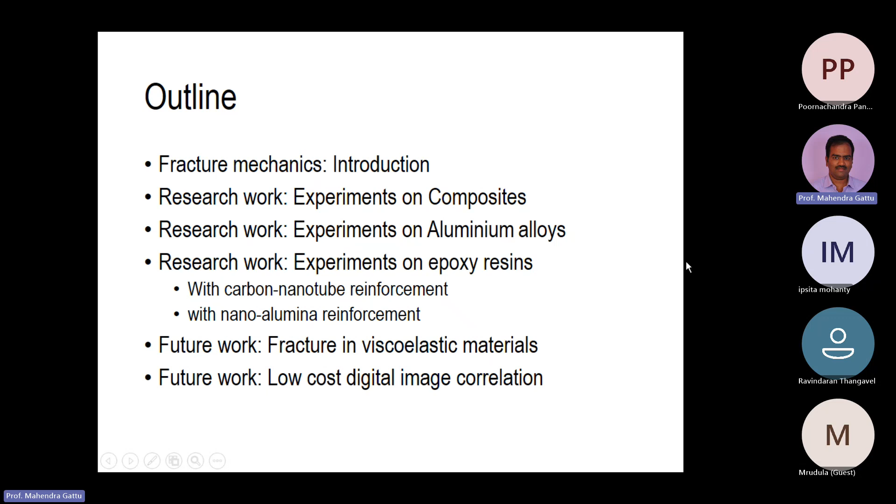I have studied both these reinforcements, the effect of both the carbon nanotube reinforcement and nano alumina reinforcement in epoxy resins. Currently, I'm working in fracture in viscoelastic materials, and I'll go through some of the results in that area. This topic I was supposed to pursue, but due to some reason I couldn't do it.

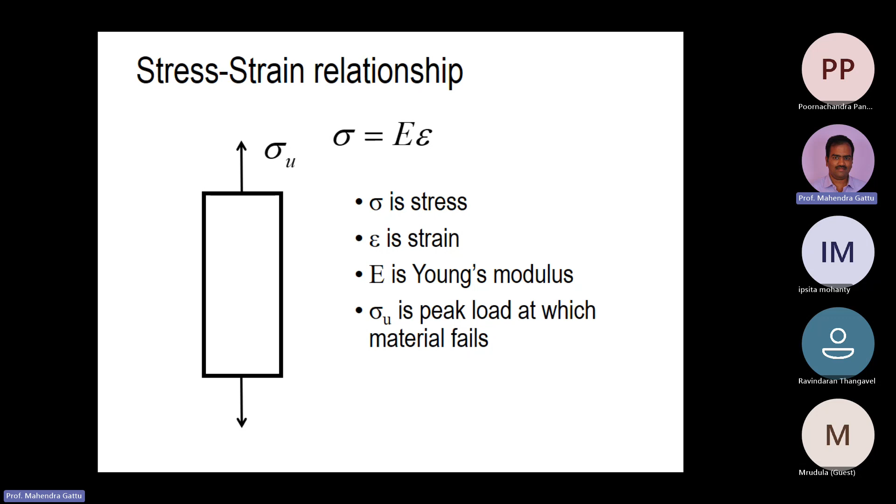This is for a material in which there are no inherent flaws, but most materials have some flaws. Flaws can be holes or cracks which develop during the loading process. So what will happen to the load carrying capacity, the load carrying ability, in presence of cracks? This is the question we answer in fracture mechanics.

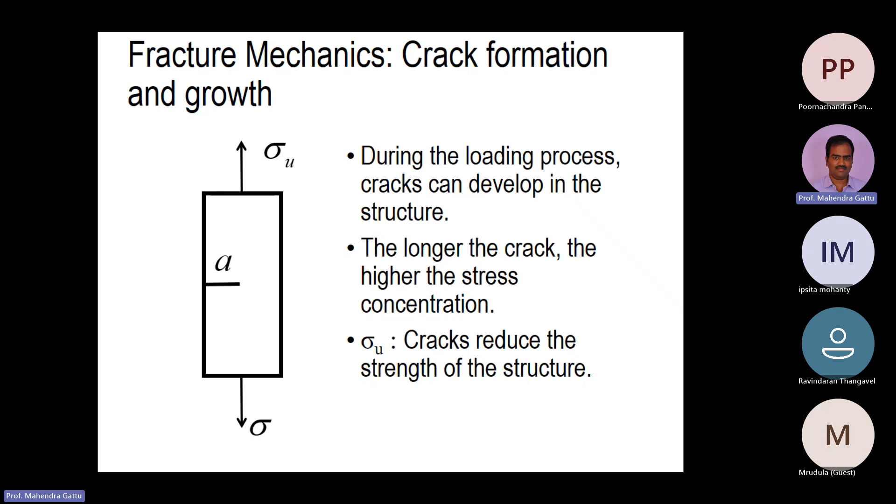As we increase the load, the crack starts to grow, and the material will not be able to take more load, and at one point it will fail, and we can find the peak strength. If you do experiments, what we find is, depending on the crack size, the residual strength reduces. This is the relationship between crack length in the material, the structure, and its peak load.

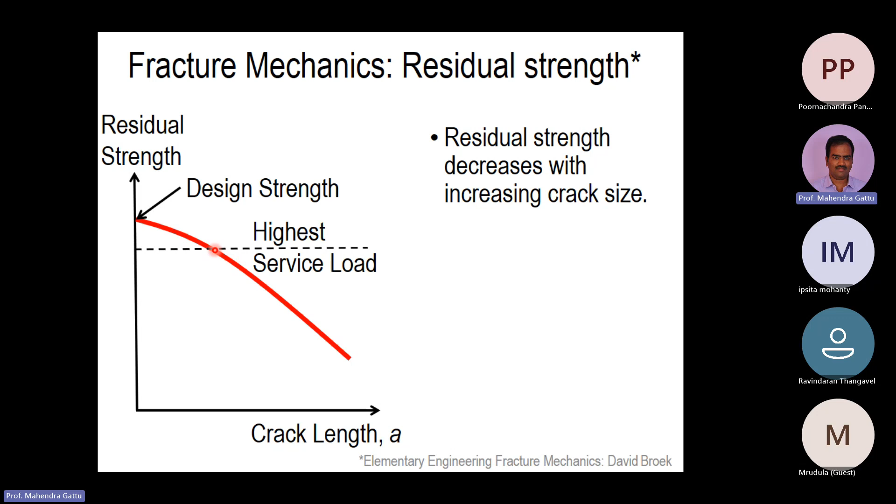As we keep increasing the crack length, the strength of the structure reduces. This has been established experimentally. Without any crack, we have our design strength given by the strength of materials, but in presence of a crack, we have some reduction in strength. Usually, if the crack length is less than a certain value, then for the design service load, the structure is safe. But if the crack length exceeds this value, then for the applied service load, it might fail.

And if the crack length is very large, then the material might fail even for normal service loads, because the residual strength drops with the increase in crack length.

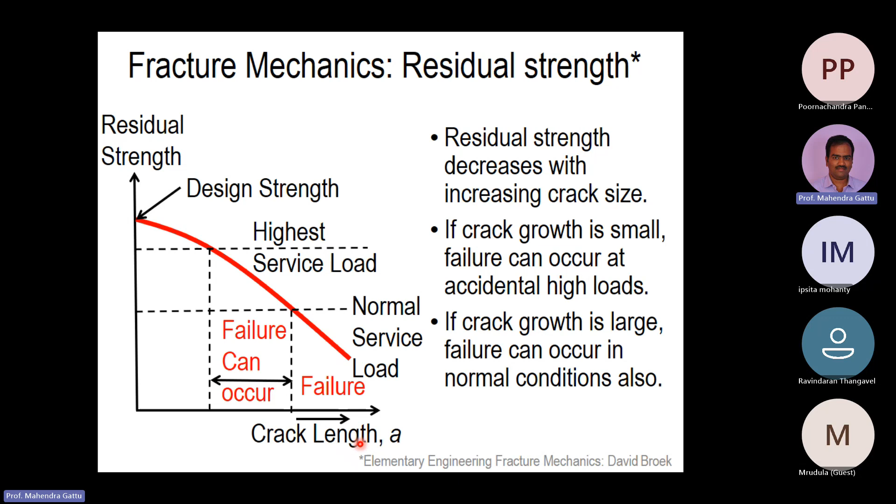In fracture mechanics, we provide a theoretical framework where we look into the strength of a structure in the presence of cracks. That's what I want to convey from this slide. Fracture mechanics, as a subject, is an intersection of a lot of fields.

Depending on the length scale, that is, depending on the size we are focusing on, we can have atomistic fracture mechanics, where we look into the fracture happening between molecules. There is bond energy, interatomic potential, and atomistic modeling of fracture. Going to a slightly higher size, we look into dislocations, material dislocations, and grain boundaries. This part is usually dealt with by material science people.

Going to a little higher size, we have stress-strain quantities and plasticity concepts used to describe metals, and we are in the applied mechanics domain.

At the normal size, like what you see in the real world, we are in the engineering side, where we do testing and such. Whatever tests we do in the laboratories, we transfer that information so that we can actually build bigger applications. Suppose you want to build an aircraft: before actually building it, you do tests in the laboratory and use that information to design the aircraft. Similarly for buildings, if you want to build a column or beam, you do material strength testing at the laboratory level, and then scale it up to find the strength of the structure in real life. Same thing applies for naval structures.

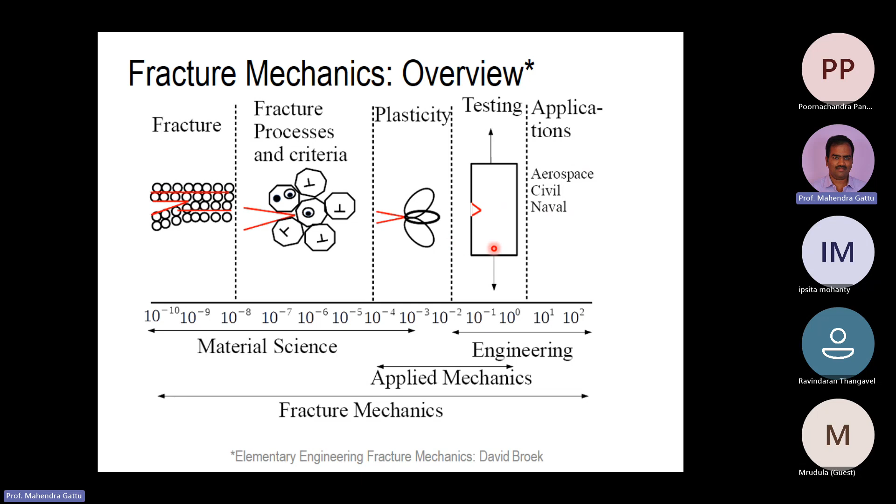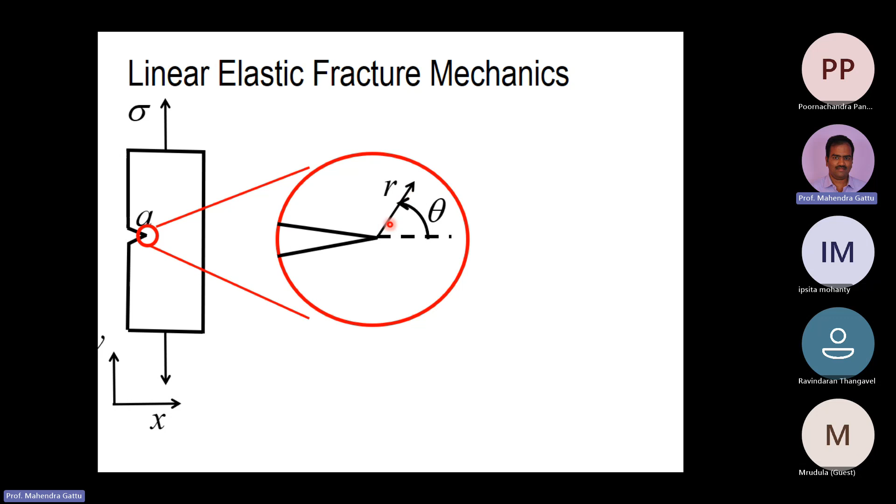We have theta and r as the radial coordinate, and the stress is given by this formula, where K is the stress intensity factor, and stress is inversely proportional to 1 by square root of r. So at the crack tip, we can expect infinite stresses according to linear elastic fracture mechanics theory, and as you move away from the crack tip, the stress will drop down.

We also have the Fij of theta term, which is a geometric factor independent of the applied load. Ki is dependent on the applied load, while Fij is independent of it. So Ki is proportional to the applied load.

What is happening here is when you apply the load, the crack will try to open up. This is called mode 1 fracture, so we have K1, the mode 1 stress intensity factor. Fij is independent of the applied load, and K is proportional to the applied load.

So we can calculate what is the... just one minute. Sorry, yeah.

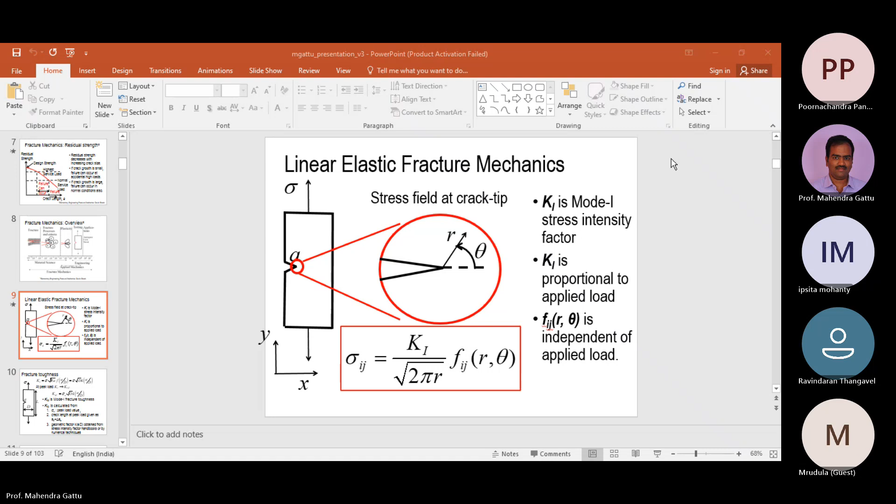In fracture mechanics, there is a term called fracture toughness, which is used, and I will describe it here. We have our stress intensity factor K equal to sigma times square root of pi a, times f of a by d.

So this f of a by d function can be obtained from the stress intensity factor handbooks. Depending on the geometry of the problem, we can look into the stress intensity factor handbook and find out what is f of a by d, and find the KI.

We can rewrite this equation like this also. We multiply and divide by square root d, and then we get square root of pi a by d times f of a by d, which we write as K of a by d. So in my analysis, I will be using this K instead of f. So, sigma square root d K of a by d.

Now, what is fracture toughness? When you keep applying the load, the crack will grow, and at a certain point the peak load will be reached. So we find out what is the K at that peak load. Instead of sigma being the applied load, we put sigma as sigma u. When you put that value and find K, that K is called the fracture toughness, KIC. So KIC is the mode 1 fracture toughness.

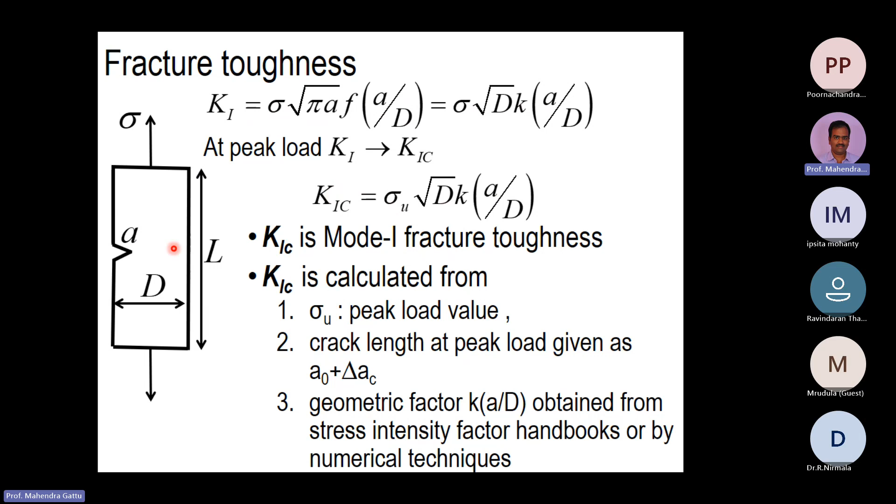But there is a catch here. Actually, in most laboratories, at least in our NIT-RKL, we don't have equipment to measure the crack growth. So what we have to do is we can only get the initial crack length, and we don't know what is the crack length at the peak load. So we use our initial crack length while calculating the fracture toughness. This fracture toughness is called apparent fracture toughness, because we are not actually finding out the crack length at the peak load.

If you have equipment, we can find out the crack length at peak load, and then we get the real fracture toughness. So KIC, with sigma as sigma u and A as A naught plus delta AC, gives the actual fracture toughness. This is one point I want to make, because I will discuss this again later. In our laboratory, without using any equipment, we are able to calculate the crack growth length at the peak load using our testing process. I'll talk about that in the next slide.

So this is about linear elastic fracture mechanics. It was the first starting point where the field began, and then it later progressed to other areas.

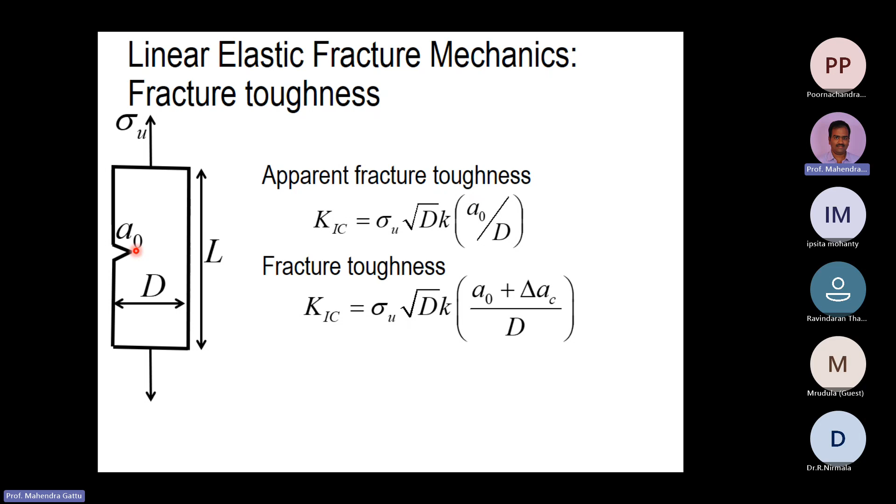In linear elastic fracture mechanics, there are some fracture processes happening at the crack tip, which we can divide into zones. One zone is the nonlinear hardening zone, where the material gives a hardening response - with increase in stress or strain, the stress will increase. The blue color dots represent the softening zone, where voids are created and the material gets damaged. In linear elastic fracture mechanics, these two zones are negligibly small, and we approximate them as taking place at a single point just near the crack tip.

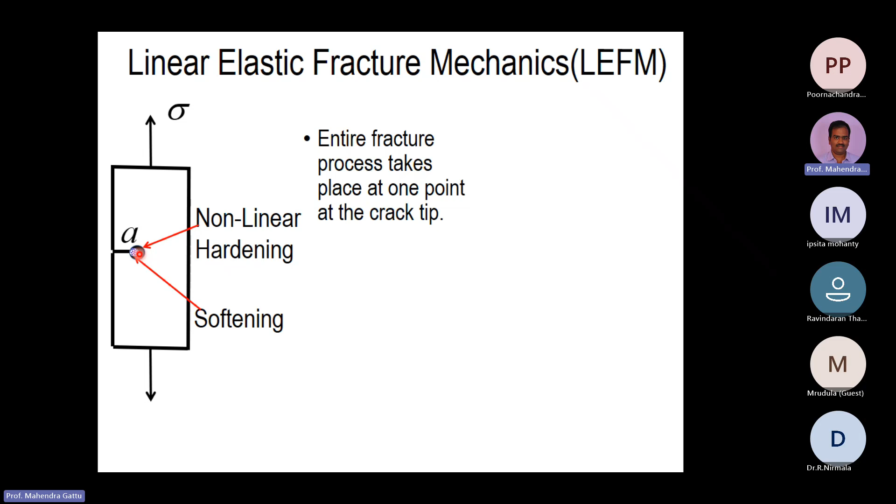This is one main theoretical assumption for linear elastic fracture mechanics - that all the fracture processes taking place happen at a point just at the crack tip. The size of this fracturing zone and nonlinear hardening zone is very small compared to the size of the structure.

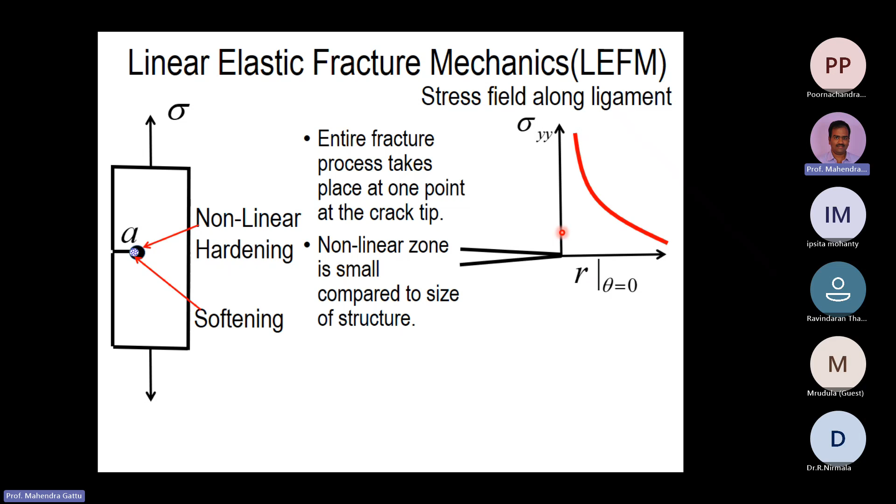If you plot the stress field, KI by square root of 2 pi r, along theta equals 0 degrees, we have the stress field like this. As we approach the crack tip, the stress shoots up to an infinite value according to linear elastic fracture mechanics. But in reality, it is not like that, so we have to modify the theory a little bit to account for that.

So in metals, scientists have developed elastic plastic fracture mechanics. At the crack tip we have a zone of nonlinear hardening and a softening zone. This nonlinear hardening zone is very large and it dictates the crack growth, while the softening zone is negligibly small compared to it.

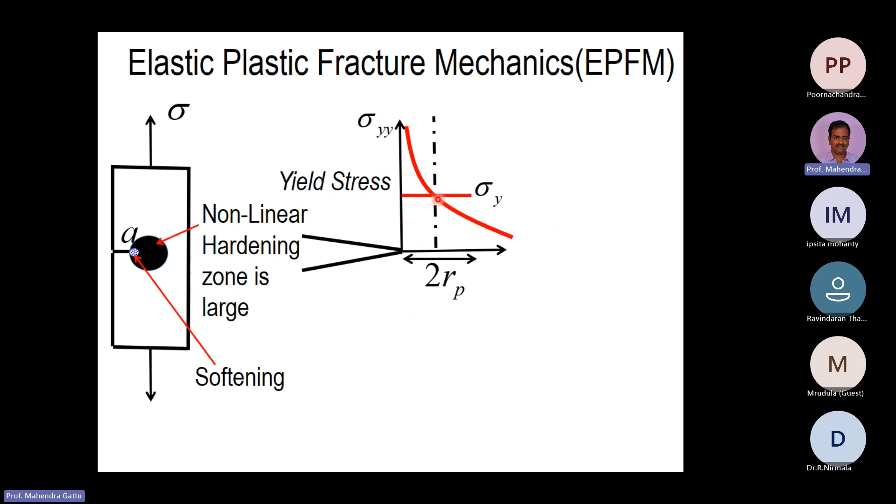As we have seen, the stress at the crack tip shoots to infinity, but actually before it reaches infinity value, it reaches the yield stress, and the material will start to yield in this region. So whenever the yield stress is exceeded, the material will start to yield, and we can find out what is the yielding zone at the crack tip.

If you just apply the formula, sigma y equals KI by square root of 2 pi rp, we get the rp value as 1 by 2 pi times KI by sigma y, whole square.

However, if you go a little deeper and do a force balance of the ligament length—ligament being the uncut portion—we have to adjust this rp value so it is twice the value. This force which is developing will take care of the force equilibrium in the vertical direction. So the actual plastic zone size is 2rp, which equals 1 by pi times KI by sigma y, whole square.

This theory of elastic plastic fracture mechanics is applicable to ductile materials and also tough alloys.

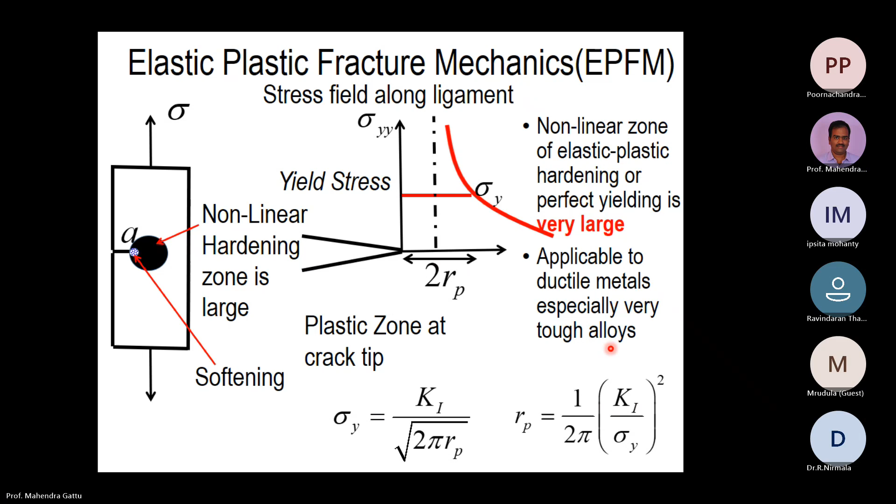Now the field I will describe is quasi-brittle fracture mechanics, for quasi-brittle materials. Most engineering materials are quasi-brittle. For example, concrete, composites, polymers, bones, and many other engineering materials come under this category.

The theory of quasi-brittle fracture mechanics has been accepted by the American Concrete Institute, committee ACI 446. They have recommended quasi-brittle fracture mechanics based design, at least in shear, and included it in the code in 2020. After a lot of research and debate, they have finally accepted this quasi-brittle fracture mechanics. So it is a very important concept for all civil engineers involved in design of concrete structures. So what exactly is quasi-brittle fracture mechanics?

At the crack tip, as I said for metals, we have a nonlinear hardening zone and a softening zone. For concrete, this nonlinear hardening zone is very small compared to the softening zone. The softening zone is very large.

The softening zone consists of micro cracking, void formation, interface breakage, and frictional slip. Frictional slip means aggregate frictional slip can happen. Void formation means creation of voids, and micro cracking means small micro cracks which will coalesce and become a larger crack. Interface breakage means breakage between the matrix and the aggregate. All this comes under softening.

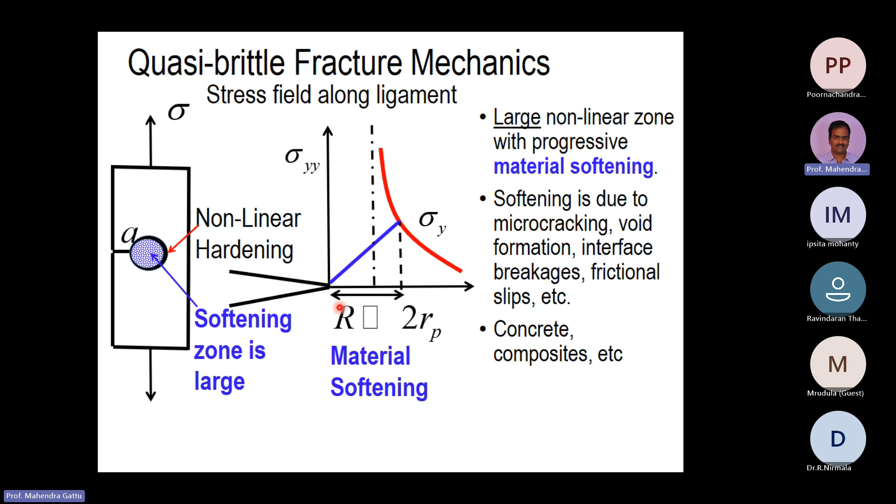For quasi-brittle fracture mechanics, we have developed one model called the equivalent elastic crack model. I will describe a little bit of mathematics, and hopefully you will be able to appreciate it when I present the analysis of the experiments.

In this equivalent elastic crack model, we have A naught, which is the initial crack length before a load was applied. As you keep applying the load, the crack length will increase. Initially, fracture will start to happen at the crack tip with small micro cracks, and those micro cracks will become larger cracks, and finally we can see a physical crack that is materially separated.

At the peak load, we can see some physical crack here, and the crack tip has moved from this point to this point. We are now seeing a fracture process zone size, which is shaded, shown as a shaded region.

So this is what is happening in reality. There is this initial crack length, this physical crack, and at the new crack tip there is this fracture process zone.

Let's say the tip of the fracture process zone is S, and the tip of the physical crack is T. For analysis purposes, at the peak load, we approximate this fracture process zone and the physical crack by this stress distribution.

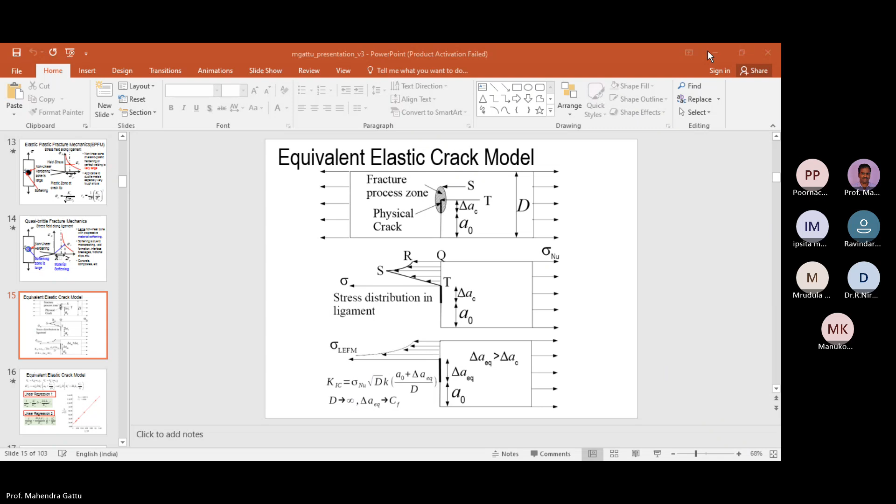So we have the structure size D here. As the structure size increases, becoming large, this delta A equivalent will approach one value called CF, the material characteristic length. For very large structure, meaning infinite size structure, this delta A equivalent will stabilize and reach one critical value called CF, a material property. So for a very large size, whatever fracture, the maximum possible fracture process zone which you can develop is CF, called the material characteristic length.

We can simplify the equations of this equivalent elastic crack model. We have KIC, squaring the term, and K naught square is a function of alpha naught plus CF by D. For large size, we are just putting delta A equivalent as CF.

And here we do a Taylor series expansion. If f of x plus delta x equals f of x plus f derivative times delta x. So here K naught square, K naught of alpha whole square, denoted as K naught square of alpha naught, and the derivative of K naught of alpha square is 2 K naught K prime. The delta x value is CF by D. This is a simple Taylor series expansion we are doing for the KIC square.

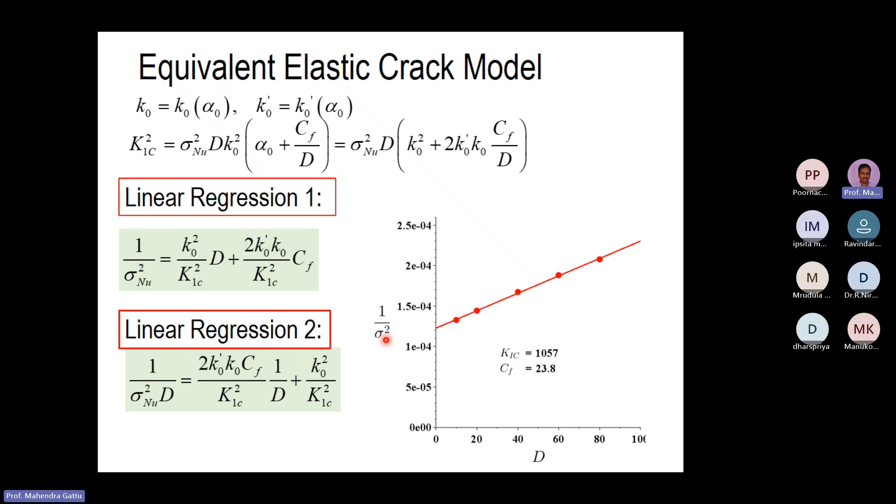Hey, hi Mahendra. I was busy in a meeting, I joined just now, sorry for that. Who was speaking, sir? Sai speaking here. Oh okay, Sai Krishna, nice meeting you. I was busy in other stuff, I just joined, I just got a guest. I forgot your previous data. Okay, thank you for joining. It was Sunday time. I'm actually recording this video so that in case I can send it to the participants. And point taken, thanks, I'll continue. Yeah, you can continue.

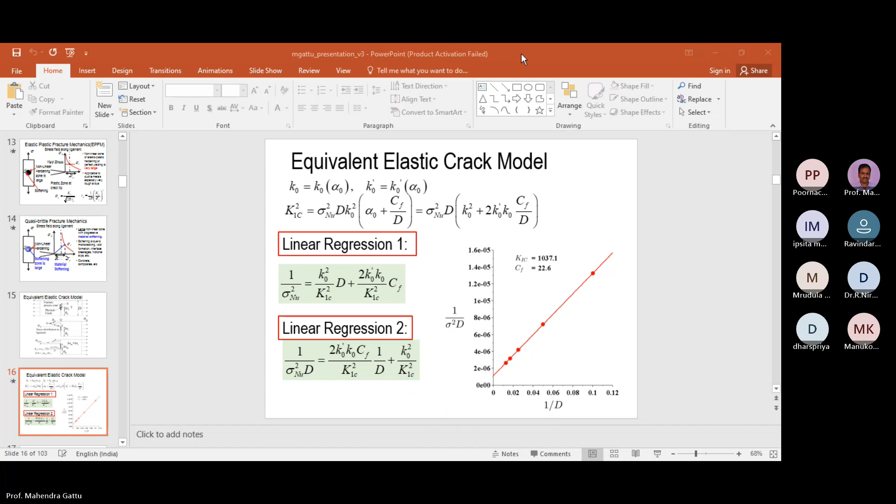So basically, I have written some FEM code where I have calculated the peak load values for different sizes, and I plot 1 by sigma square on the y-axis and d on the x-axis. D is the size of the structure, and I can see that the quasi-brittle simulation curve is coming.

This 1 by sigma square term is on the y-axis, and D is on the x-axis. So if we find the slope of this... What simulation have you used for calculating this?

I have used a cohesive crack model. In a cohesive crack model, we model the material by using a traction separation law. I think you have missed the previous part, so I'll just go through that.

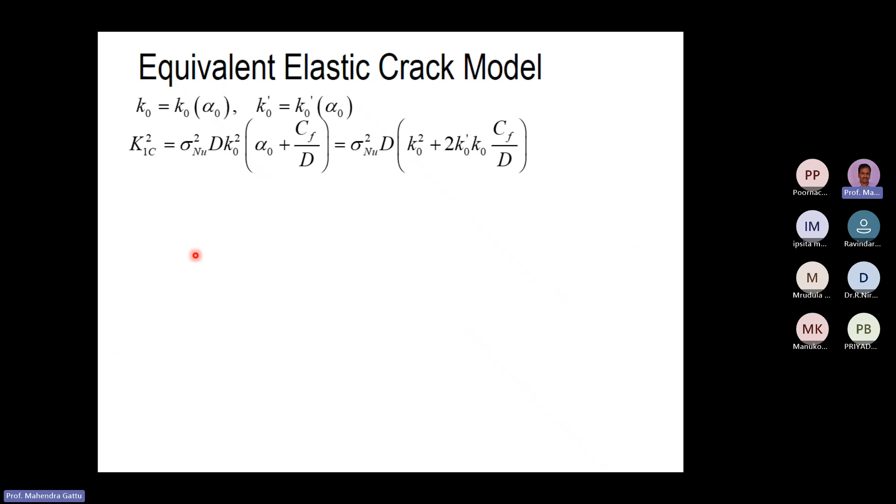So what is happening here is at the crack tip, there is a fracture process happening. Fracture process means material is breaking up, and that means the material's load carrying capacity is getting reduced. So this ligament, this region, we can model using a cohesive crack model. That means the peak stress has reached in this region and the material has started failing, so the load will drop down - that load dropping down is shown here.

So the maximum stress which the material can take is here, and beyond that, when you keep loading it, the material is softening - this is the softening part. So at this point, does the load fluctuate?

No. At the crack tip, fracture is happening, meaning the material is breaking up. But that fracture is not at a point - it might even elongate or something like that. Yeah, that is what I'm saying, this is the fracture process. That means in this region, fracture is occurring everywhere.

But within this region, certain part of the region has more fracture, so its load carrying capacity is very less. You are talking within the boundary of a crack, certain part might be... that is what you are calculating, right?

Yeah, so if you see here, this region is uncracked, nothing has happened here, so the peak load has not yet been reached. But at the crack tip, the peak load has been reached, the material has broken down, and the load carrying capacity has reduced. So the actual load carrying capacity is this much only in this region, and if you just go near the crack, it is very less.

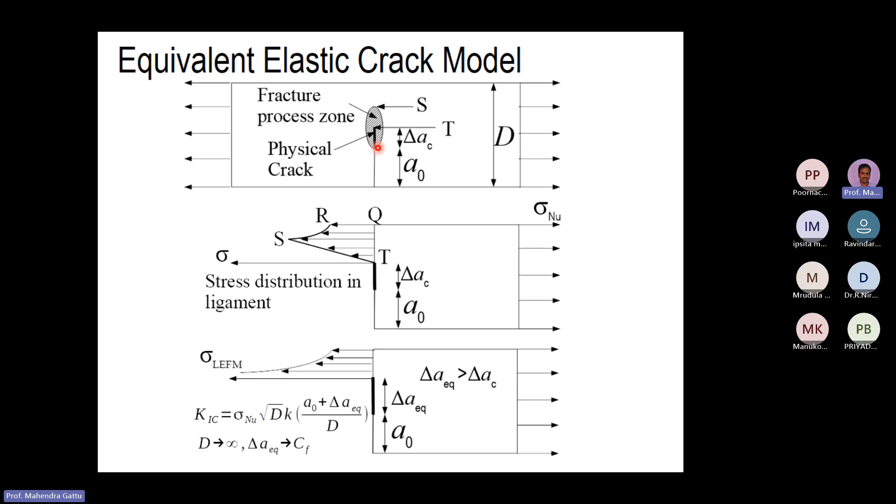I'm not showing the details on all that, but just for illustration, I'm saying that when you do FEM analysis also using the traction separation properties of the material, we can simulate this quasi-brittle property, quasi-brittle equations, the equivalent elastic crack model.

So from FEM simulations, we can get sigma value and D value, and if you plot it, you get a curve like this. The slope of this line is equal to K naught square by KIC square, and we can find out the KIC value, which is the fracture toughness. From the intercept, you can calculate this value.

We already know KIC, so from that we can get the CF value, which is the material characteristic length. So these two fracture properties we can determine.

This is done using FEM, but we'll do experiments and get similar results. This is linear regression analysis two, and from there we will get the KIC and CF value. So CF value is 22.6 millimeter, and KIC is 1037.1. The units are Newton millimeter power 3/2, something like that.

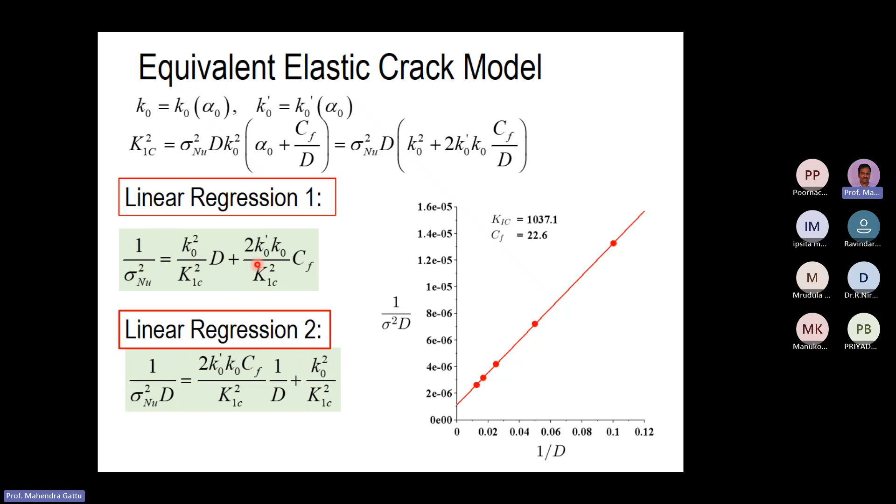Yes, so with this basics, let's simplify this equation further, and we get a form which I hope you can understand. This is the classical equation. I'll describe the size effect equation. The two linear regression analysis equations are obtained from the Taylor series expansion, which is shown here.

K1C square sigma Nu square D. You have k naught square, k naught derivative, which is 2 k naught dash k naught. This equation can be recast in this form.

So we write sigma nu as BFT by square root of 1 plus d by d naught. This is the size effect equation which was developed by Professor Bazant at Northwestern University in the early 1980s.

So what does this equation mean? On the left hand side we have the strength of the structure, sigma nu, and on the right hand side we have a denominator term, 1 plus d by d naught. D is the size of the structure, and d naught is a material property, basically a function of the material characteristic length. BFT can be thought of as: when the size of the structure is 0, we get sigma nu equals BFT.

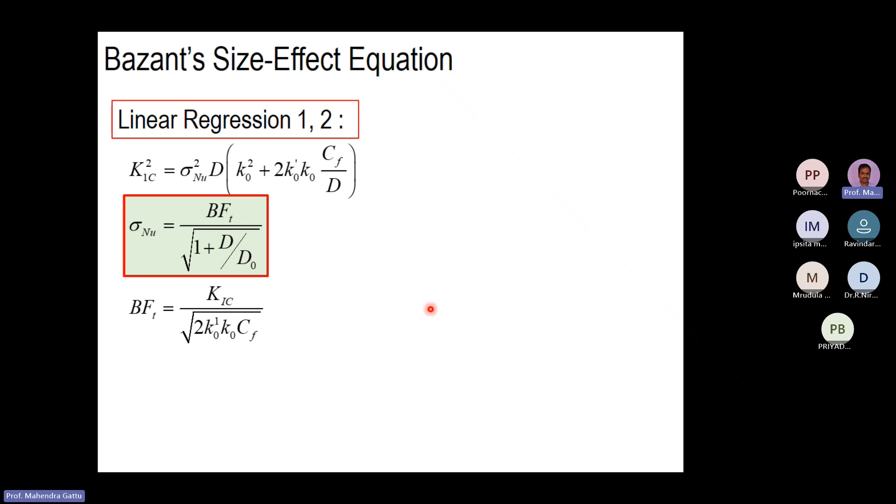So we are seeing that as the size of the structure... some noise is there, so I have to mute that. Yeah, I think I'm muting it. Yeah, I'm muted, so I think I'll carry on.

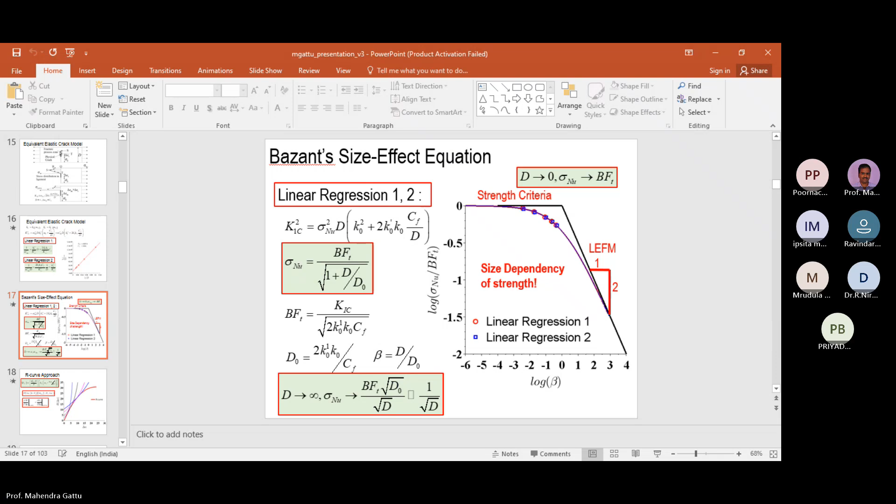So the thing we have to observe is that on the left hand side here, the structure size is small, and as you move along this axis, the structure size is increasing. And if you move from this axis in the upward direction, the strength will increase. So what you're seeing here is a structure with a smaller size has a higher strength compared to a structure with a larger size.

So a larger size structure has less strength compared to a structure with a smaller size. So we are seeing a size dependency of strength for quasi-brittle materials. In mechanics of materials, we calculate our sigma peak value for a given size in the laboratory, and then we use that peak stress value for design in actual real life structures. But from the theory of quasi-brittle fracture mechanics, we see that for larger size structures, the strength is less compared to a smaller size structure in the presence of cracks. In presence of cracks, there is a size dependency of strength.

So usually laboratory tests are done for small size, so you determine the strength there. And if you use that strength for design of a real life structure, then the actual strength of the structure is smaller compared to the laboratory test. So that might be a wrong design. You have to account for the reduction in strength, and so here the quasi-brittle fracture mechanics comes into picture. This theory has now been accepted, as I was saying earlier, by the American Concrete Institute, and they have started using this size dependency.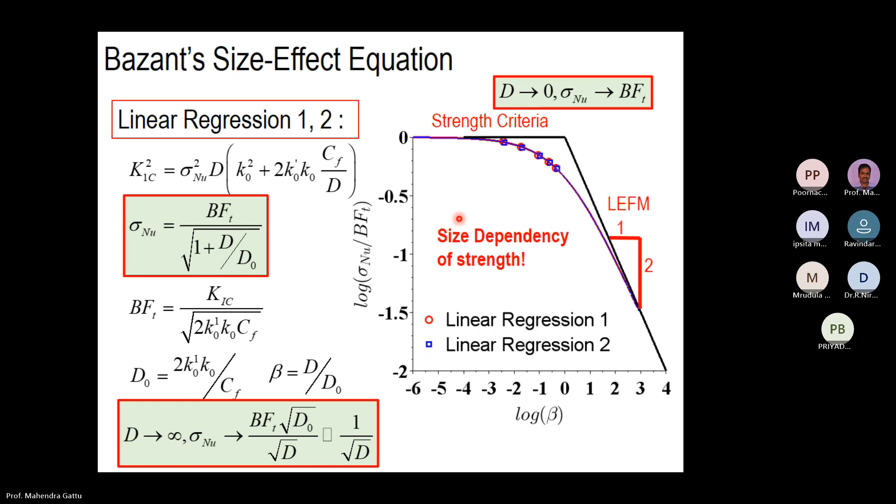There is something about the R curve, the crack growth resistance curve, which I'll try to explain. Here we have the expression for the fracture energy Gu, given as KIC squared by E. So KIC we can use from the equivalent elastic crack model and put sigma Nu squared D k naught of alpha naught plus delta A by d, whole squared. So if you plot this fracture energy curve as a function of crack length for a given size d, you get one curve, and as size increases, you get three more curves.

So I plotted it for four sizes, d1, d2, d3, d4. This is the fracture energy curve as the crack length is increasing. Initially we have a crack length, and then as crack length increases, this is the fracture energy which is dissipated. Now the R curve is called the crack growth resistance curve.

The unique property of the R curve is that it touches all these Gu curves, and it touches only at a single point. So there are two conditions it will satisfy: one is it touches these curves, and it touches at a single point - that means at that point of intersection, the slope of the R curve will be the same as the slope of the Gu curve. So effectively it will look something like this - this is the crack growth resistance curve. It touches each of the Gu curves at a single point, and since it touches a single point, these two equations will be valid: this is the intersection criteria, and this is the tangential criteria.

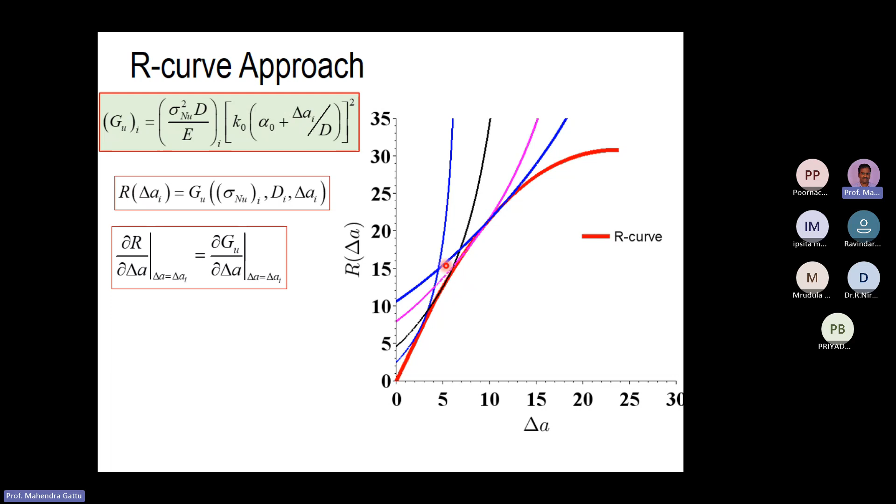This is the theory which I present now, and then we'll go ahead with the experiments. Initially when I started this topic, I had to learn all the basics of fracture mechanics, and then I began the experiments with Satyanarayana, my first PhD student, and we started with this composite material.

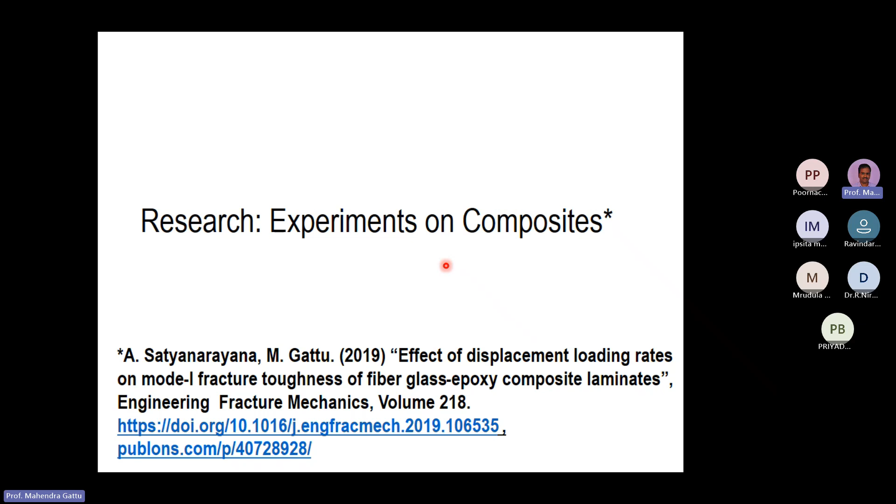On Friday, many of you attended the presentation by SK Sahu sir, who has been working on composite materials, and he was telling about glare. Glare is a glass fiber plus aluminum, which is used in the aerospace industry for building aircraft. Boeing and others are using it. The glass fiber is usually a bidirectional fiber, and this bidirectional fiber is bound by a matrix, which is something like a gum that joins these fiber sheets.

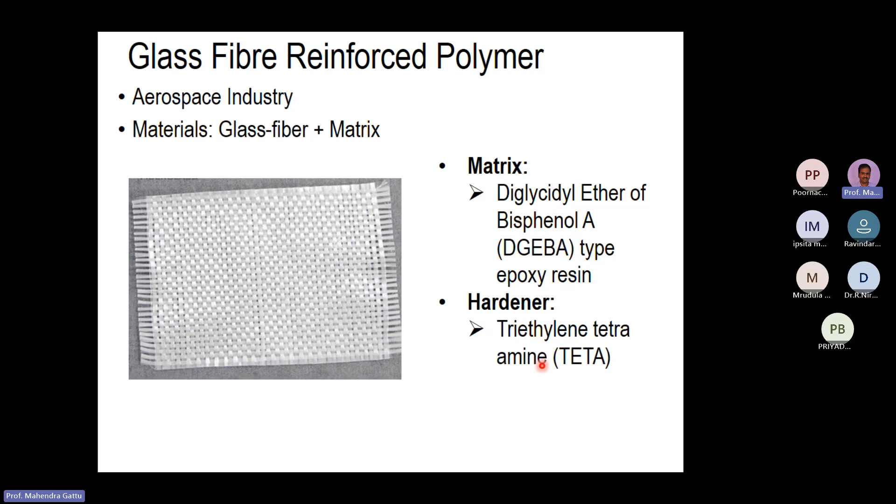For our experiment, we use this epoxy resin, diglycidyl ether of bisphenol A, and for hardener we use triethylene tetramine. So the process of making the glass fiber, we did like this.

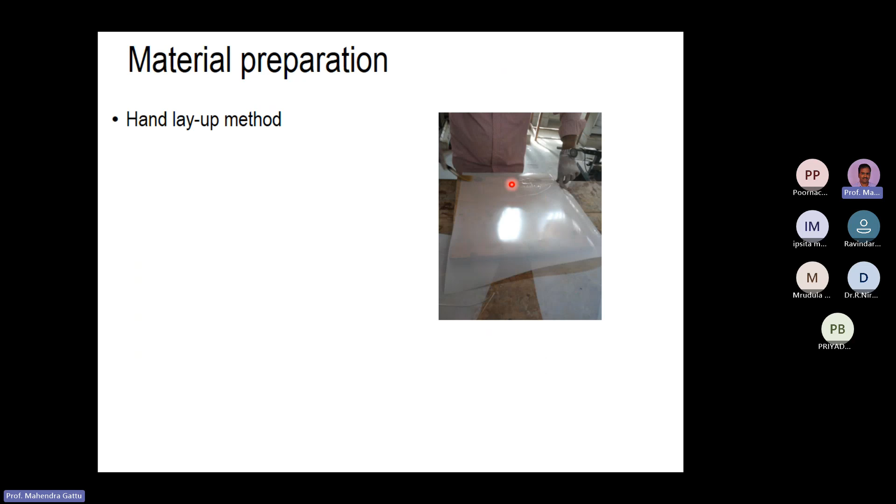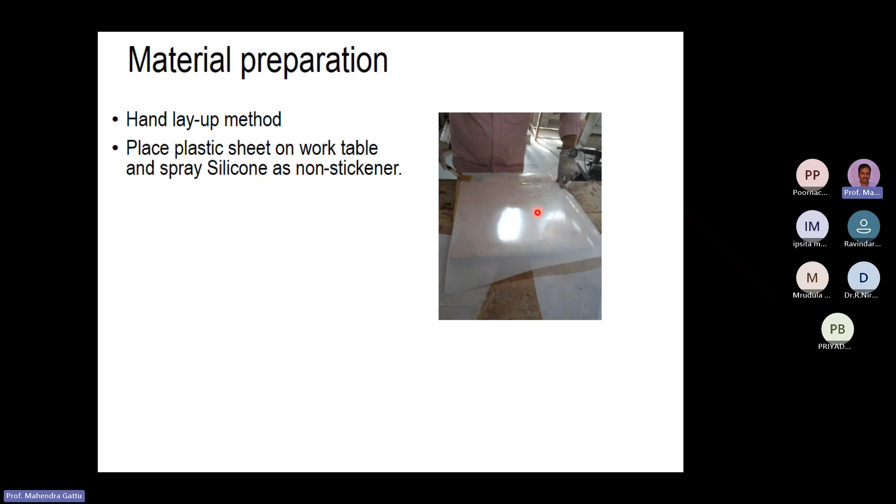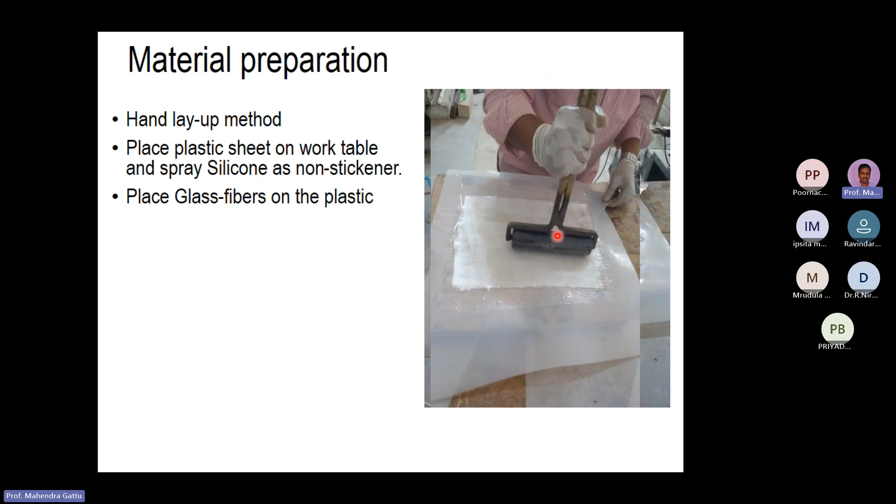We use a manual process called the hand layup method. First we place a silicone sheet, a plastic sheet, and spray a non-sticker on it. Then we place our glass fiber on top, pour some epoxy resin, and spread it uniformly using a roller. Once the resin has spread uniformly, we place another layer, roll it onto the first layer, add more resin, and repeat the process.

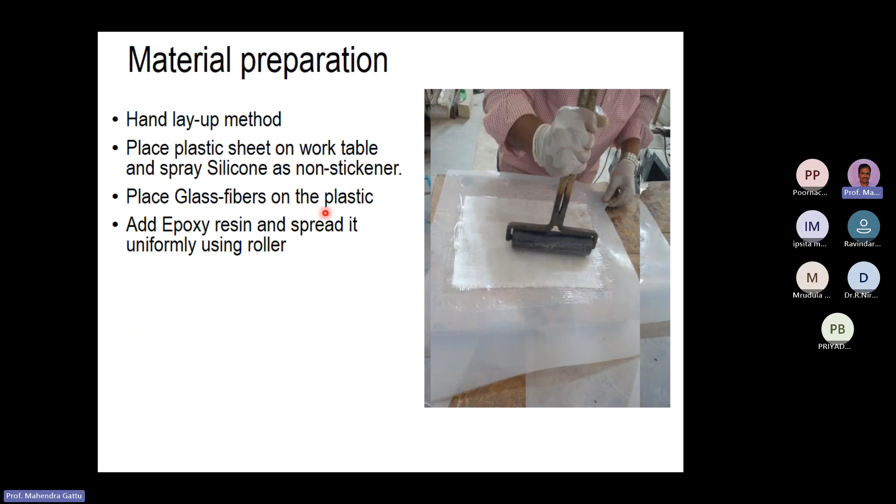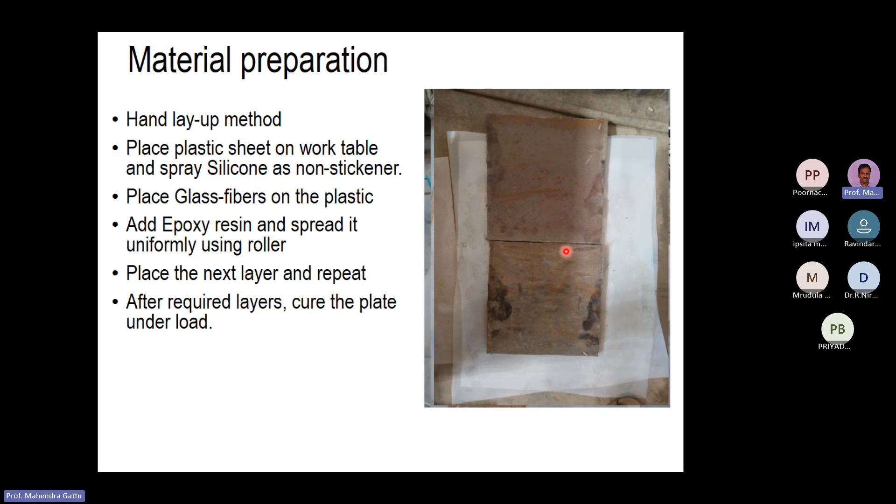We can target 8 layers or 16 layers, depending on our requirement. Once we get the required thickness, we allow curing to happen for around 3 days, and then we get the plate, which we use for our mechanical testing.

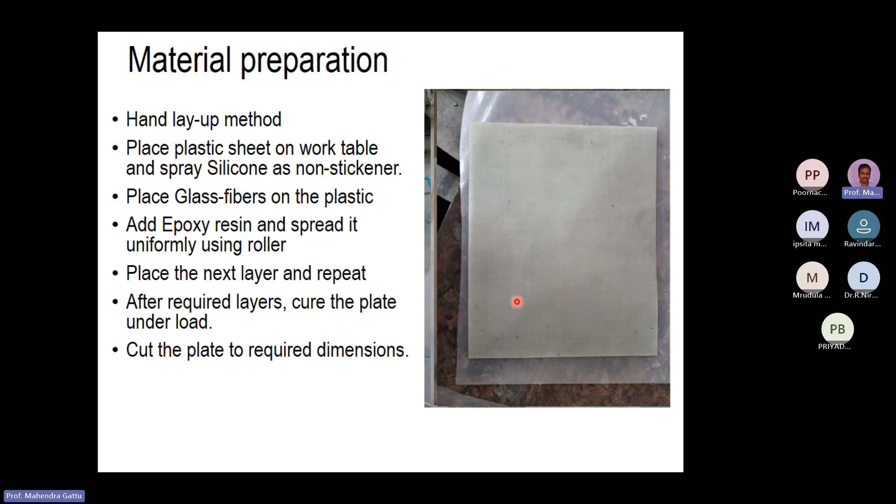We can cut this plate and prepare a test specimen, and then do some mechanical testing in our machine.

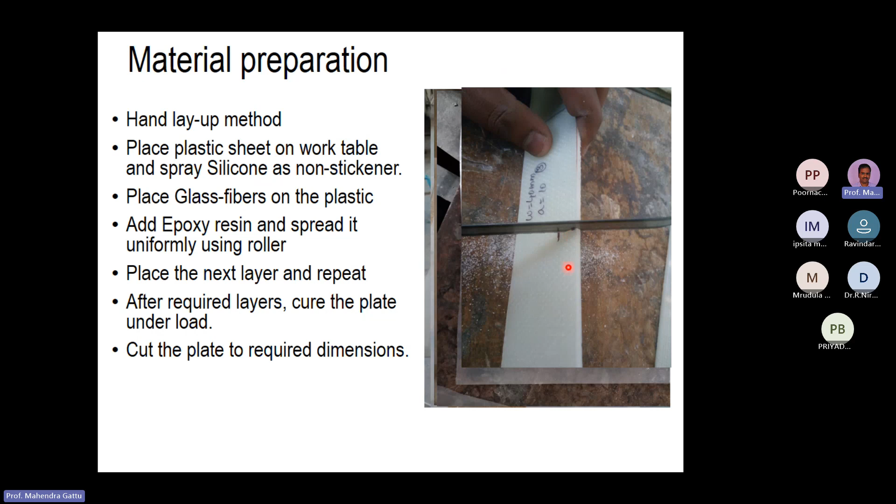Here we see a picture of the test specimen, and we are introducing a notch here. A notch is a crack; this is a blunt notch because the width of the blade is very large. So using a blunt notch, we did it, but later we realized that we should use a very sharp notch. Initially though, we used a blunt notch crack for our experiments. This is a glass fiber specimen, and this is the crack we created in it.

The experimental program we followed when we started this research was like this: we had a scaling of size 3:4:5, so we made geometrically similar specimens.

So what do we mean by geometrical similarity? The a/D ratio we fixed at around 1/4, and L/D ratio we kept as 4, and then we varied the D value as 30, 40, and 50. So a/D for all specimens will be the same, L/D for all specimens will be the same, but the size of the specimen changes from 30 to 40 to 50.

For each set of a/D ratio and D1, D2, D3, we applied different loading rates. Here we grip the material in a machine, with a defined grip length, and apply the loading rate. Loading rate can be the rate at which load is applied, or the rate at which displacement is applied — we used a displacement loading rate.

Along this edge and the opposite edge, the specimen expands or separates at a rate of 1 millimeter per minute, or alternatively 10 millimeter per minute, 100 millimeter, or 500 millimeter per minute. We tested all these rates, so there's a large change in loading rate here, from 1 to 500.

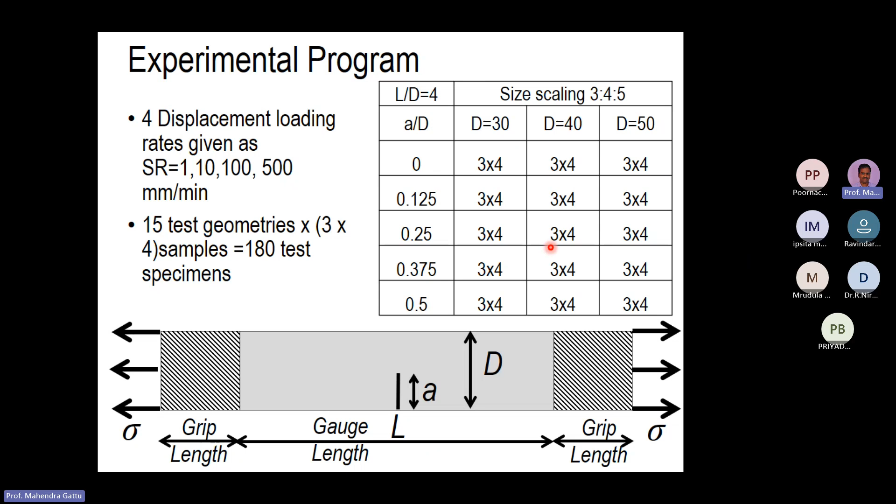For material property calculation, we tested this specimen with no notch, and we got the Young's modulus value for different loading rates. For 1 millimeter loading rate, we got 11.1 gigapascal. For 10, it is 13.7. For 100, 14.31, and for 500, it is 13.9.

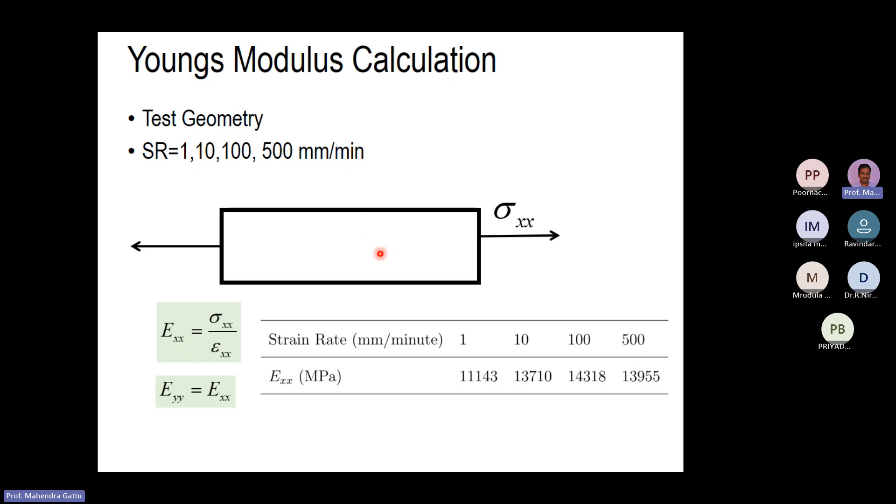Since it's a bidirectional fiber, the fiber properties in this direction are almost the same, so we have EYY is also EXX. And to find shear modulus, we have to test this specimen at the 45-degree angle, and we got E45 values.

Then we use one formula for GXY, based on the transformation of the stresses. So Q transpose sigma Q will be sigma prime. Using that, we get a formula, and based on the formula, we get the GXY value. So we can find out GXY from E45, EXX, and EYY.

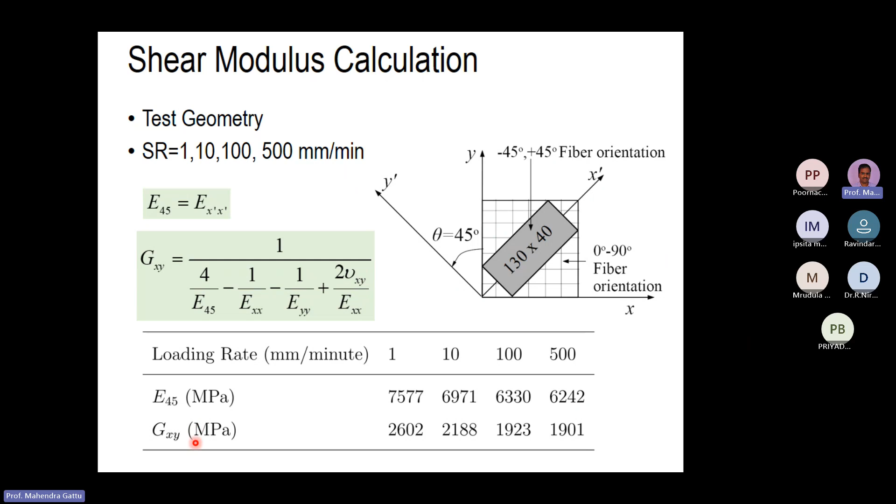Poisson ratio we're assuming based on earlier studies. So this is our GXY properties, and this is the experimental data which we get for each loading rate: 1 millimeter, 10 millimeter, 100 millimeter, and 500 millimeter.

What we're plotting is the peak stress values on the y-axis, and the A by D ratio on the x-axis. A by D means the notch depth by the diameter, the size, as shown on the x-axis here.

What we are seeing here is that with increase in the crack length, the strength is reducing. This is what I mentioned in the beginning slide: if the crack length is increasing, then the strength of the structure is reducing. That is clearly seen here.

Increase in the crack length, the strength of the structure is reducing. That's clear. The second thing we observe: the red dot corresponds to size 30, square corresponds to size 40, and triangle corresponds to size 50. We can see the red circle lying above the blue square, meaning size 30 has a higher strength than size 40, and size 40 has a higher strength than size 50. So we are seeing a size effect in the experimental data. The smaller size has a higher strength, and the largest size, the triangle, has a smaller strength.

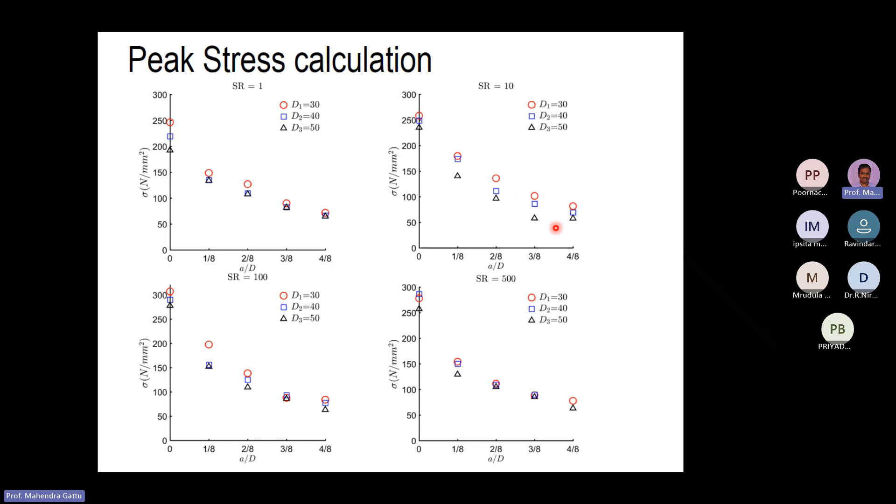So with this we can apply our analysis. We are sure there is some size effect, and this composite will follow a quasi-brittle fracture mechanics criteria. So we do our linear regression analysis using that equation, and we see the data here. I'm plotting 1 by sigma squared d k naught squared against 2 k naught prime by k naught, 1 by d, using the linear regression tool.

So this trend I'm getting, and I can plot a straight line y equals mx plus c. From the intercept and the slope, we can find our KIC and CF values. CF is coming around 8 millimeters and KIC is 1122.69, for loading rate of 1 millimeter per minute.

This is for displacement loading rate. For displacement loading of 10, we're getting this data: the CF value goes to almost 0, and KIC is a lesser value, 742. For loading rate 100, we get this trend, and for loading rate 500, we get this trend.

So what I do is calculate the KIC squared by E value, which is the fracture energy, and I plot that fracture energy in the plot.

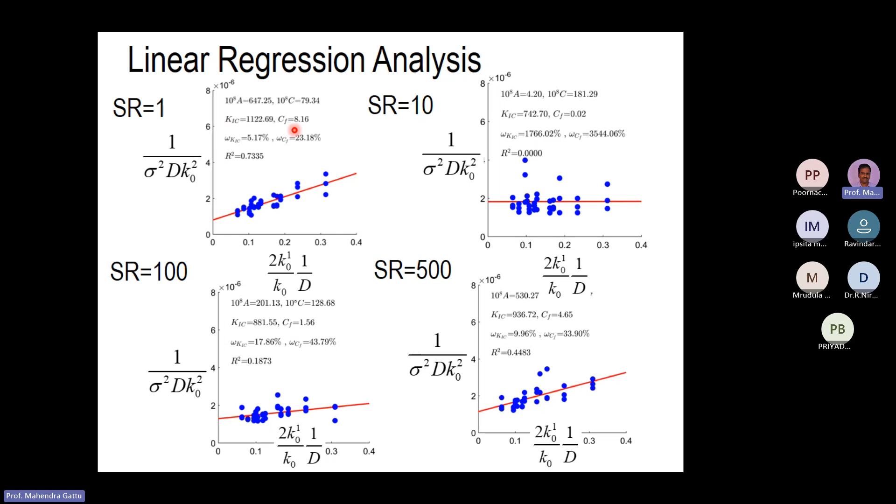For orthotropic material, the fracture energy calculation uses these equations. We introduce one parameter lambda, then calculate this rho value, then calculate the homogenizing modulus E star, and then we get GF, which is KIC squared by E star.

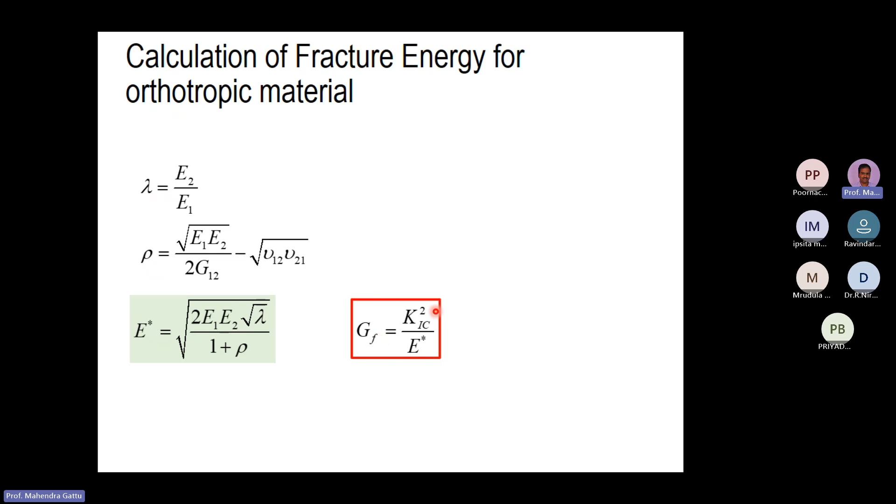Using this, if you plot the fracture energy on the y-axis and the logarithm of the displacement loading rate on the x-axis: 10 power 0 is 1, 10 power 1 is 10, 10 squared is 100, 10 cubed is 1000, and 500 is somewhere in here. The red circle is the GF. Initially at loading rate 1 we have a high GF value, then it reduces at 10, then it increases again and reaches this value. Similarly, the CF, which is the fracture process zone size or material characteristic length, also follows this trend.

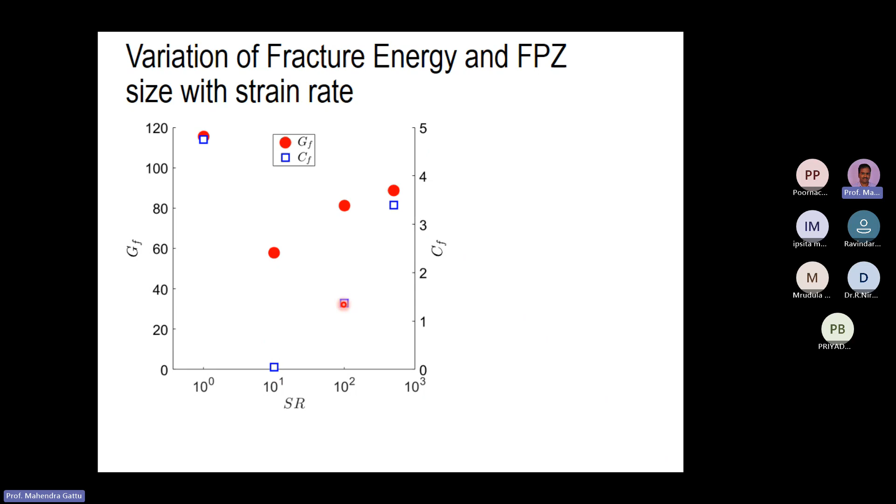Initially it is increasing, it is high, around 5 millimeters, and then it goes to 0, and then it is around between 1 and 2, and after that it is between 3 and 4. So this is what we observe. So we want to understand why this is happening.

So to understand that, we look at the SEM imaging, that is the scanning electron microscope images of the failed specimens. And what we found was between 1 to 10, 10 to 100, and 100 to 500, the mechanism of failure in the composite material was different.

At these higher loading rates, say from 10 to 100 and 100 to 500, we found multiple failure mechanisms, and the fibers in the lateral direction, perpendicular to the loading direction, also started to fail. As a result, the FPZ size started to increase. So this was what we understood at that point of time.

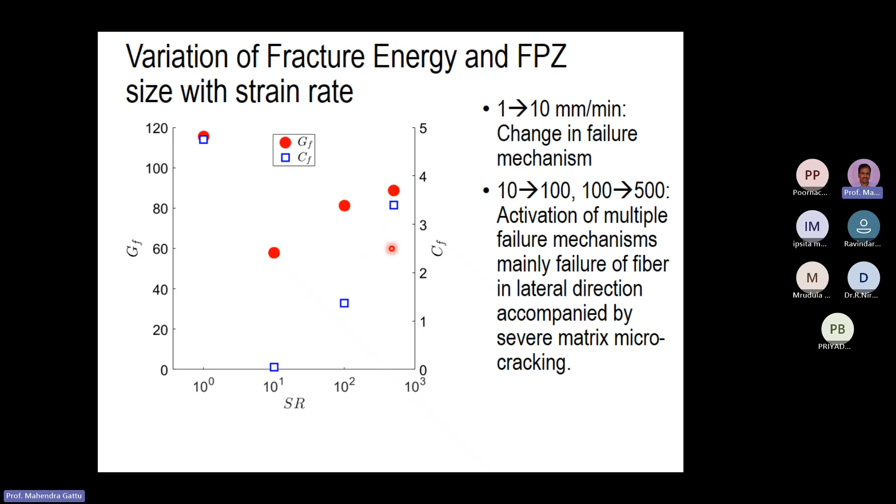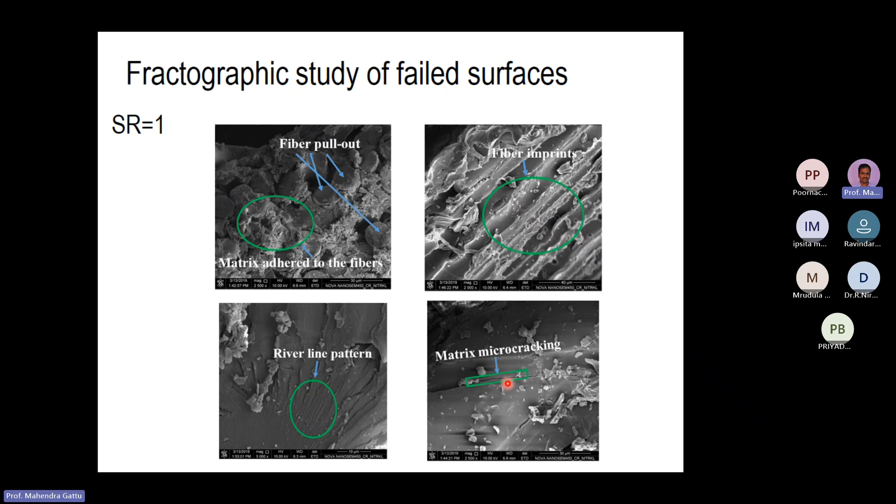So we wrote our first paper using this data, basing on the SEM images for different loading rates. We looked at the SEM images, done in our metallurgy laboratory, examining the failure surface: fiber pullout, fiber imprints, matrix microcracking (cracking in the epoxy resin), and riverline patterns in the epoxy resin.

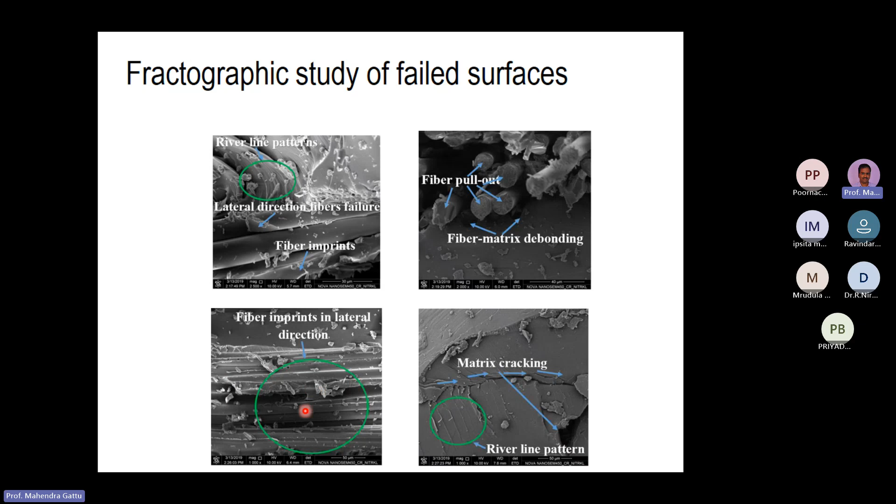At this loading rate we found fiber pull-out, fibers actually pulling out. At higher loading rates we found matrix-fiber debonding, with a lot of breaking in the lateral direction — if the load is applied in one direction, the perpendicular fibers were also breaking. At 500 we found a lot of matrix microcracking at very high loading rate. This is what we reported to the journal, and the editors and reviewers accepted it.

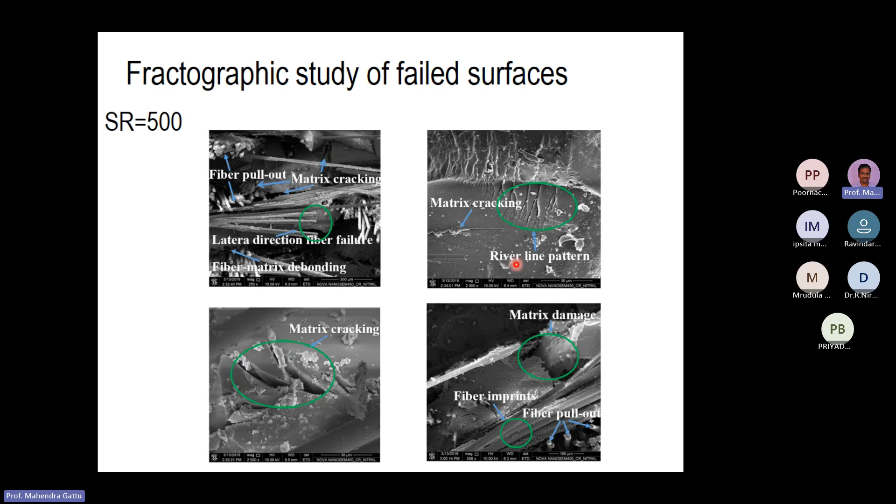So we had our first paper together, and we plotted the size effect law here, which is sigma nu equals BFT divided by 1 plus square root of d by d naught. So again the strength criteria is plotted here, and the LEFM criteria is here.

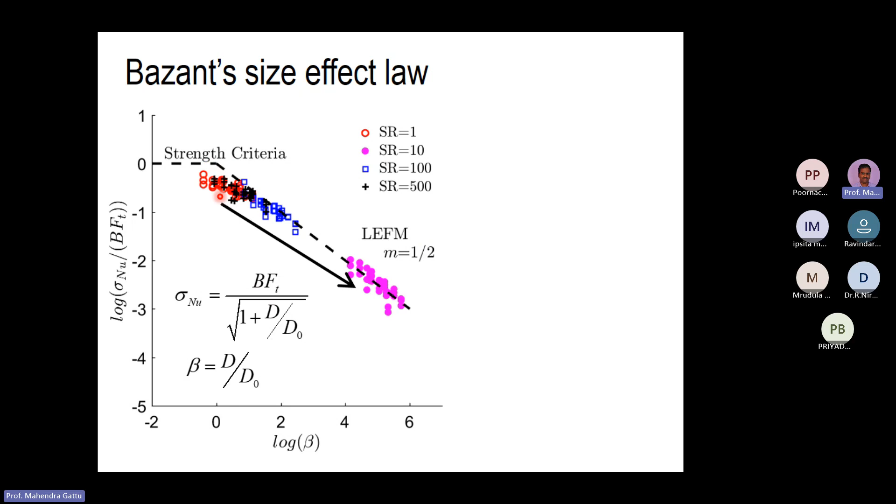All the experimental data are shown here for 180 test specimens. You can see for loading rate of 1, the cluster data is close to the strength criteria. Then at loading rate 10, the data moves, and the experimental data is close to the LEFM.

So we are seeing a sudden reduction in the fracture process size. Initially the fracture process zone size is nearly throughout the structure, then suddenly there is a drop — so all the fracture process is taking place at a point. That's why we have the LEFM criteria.

As we increase the loading rate from 10 to 100 and 100 to 500, the experimental data points move again along the curve towards the strength criteria. So we are moving towards the strength criteria now, from 10 to 100 and 100 to 500.

At that point of time we thought this was due to some loading rate effects, but right now I'm thinking there could be a viscoelastic effect, which we have not studied in detail at that point. So now I'm looking into that aspect.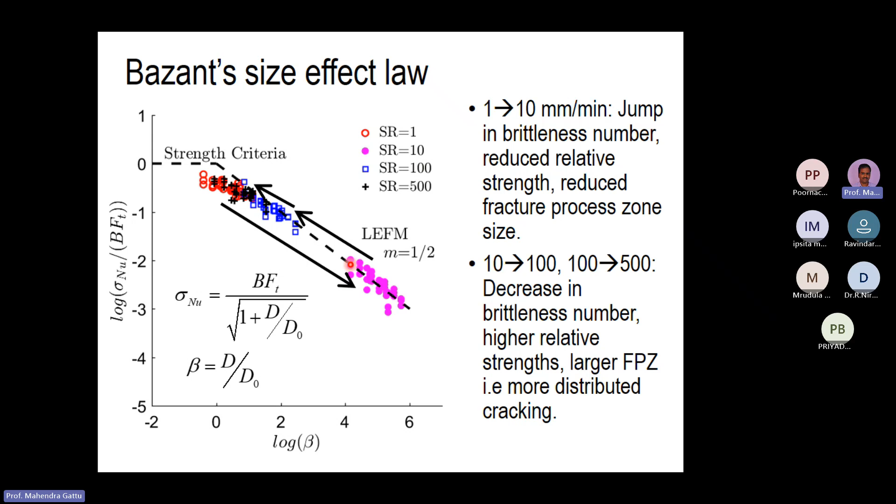I think I have spent over an hour now. Shall we continue, or is it a good time to end the presentation?

So is our audience able to follow what I presented till now? If you have any questions, you can ask, or if you're tuned out I'll probably end the talk. So, any questions from the audience? Ipsita, madam, are you here?

Yes, sir, yes sir, yeah. Yeah, I'm just going through the slides.

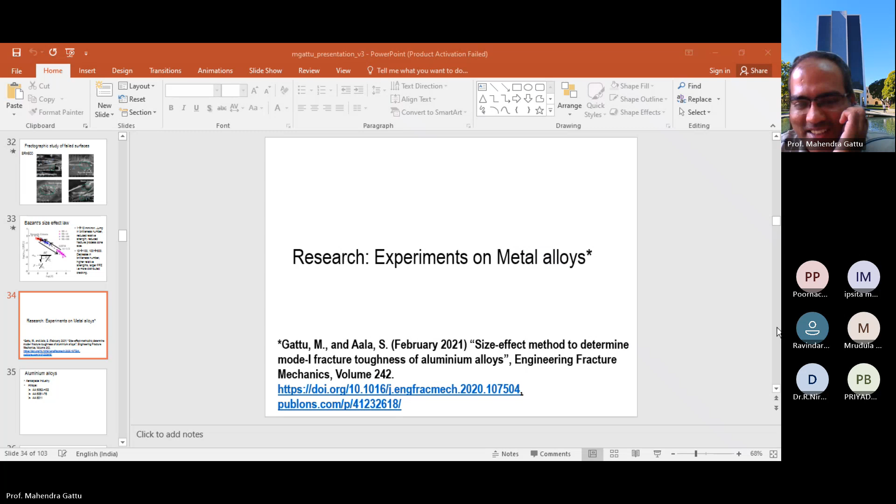There are some more slides I can present for another hour, but we can stop here also — I think I've conveyed the basic gist of my experimental program related to fracture here. So if you have any questions I'll take them, and probably I'll end it here. I've given the flavor of what I'm doing.

So regarding the scanning electron SEM images, scanning electron microscope.